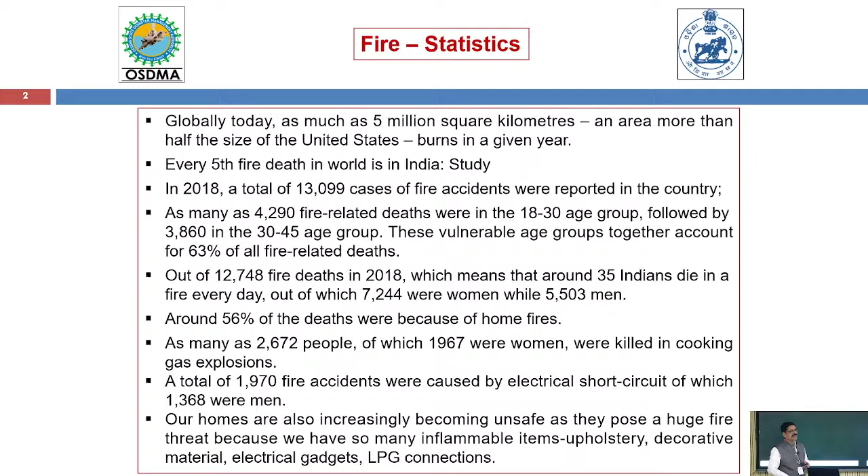If you look at the statistics in India, almost every year, 10,000 people are dying because of accidents, and Odisha's share is 10%. For the last 2 years, we have been number one. I don't know what will happen in 23, 24, 25, but till now our statistics remain concerning. Some incidents show that Indians died in fire, this was around 2019, but it indicates that 35 Indians died of fire accidents every day.

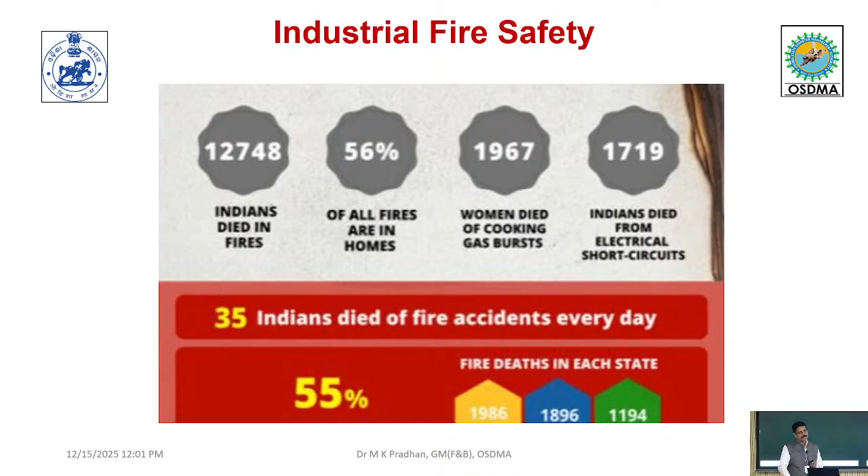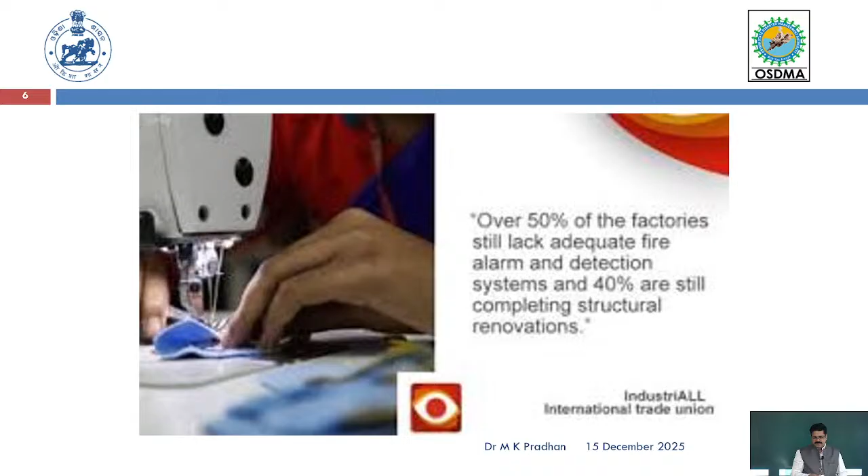If fire, I know these are all important, these things are known to you all. Now coming to the major causes of fire, the electrical source. Now you see, if you go to the fire department of government of Odisha, they will say 80% of fires are because of electrical origin. Do you know why?

The reason is once there is a fire and you go for inquiry, what will you get there? Everything is fired, only ashes are there. So the only probable thing is the electrical short circuit. Easy to tell, other things you cannot know. That is the reason why many people say 80%.

So electrical fire is like a scapegoat, all discredit goes to electrical people. But actually you don't know.

When I asked the fire department how did you know it is due to electrical short circuit, you were not there at that time. Nobody was there. If suppose an electrical fire, it will not happen overnight or immediately within 5 minutes. It will go on sparking, it will be heating, then slowly it will spread. And if it is not attended for quite a long time, then slowly it will catch fire. Am I correct? But people say it is electrical short circuit.

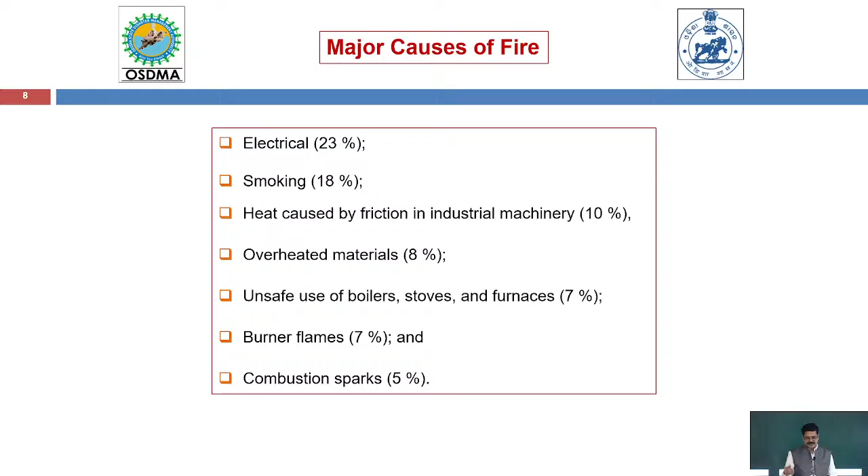Now we are coming to our state, Odisha. The best thing is these statistics we are getting from the National Crime Record. Now, the crime record gets all the information from the individual state governments. If the record is less, then these states are rewarded. So many states have their own arrangement for how to make records less.

Suppose there will be many causes - electrical fire, short circuit, somebody will say it's because of smoking like this. There will be another big column called 'others'. Others means the reason is not known, so that itself is very difficult. So they try to hide it.

But in the government of Odisha, you will be happy to know that it is already computerized. Even a person living in USA can give a fire call from USA through the portal and it will be addressed. How is it being done?

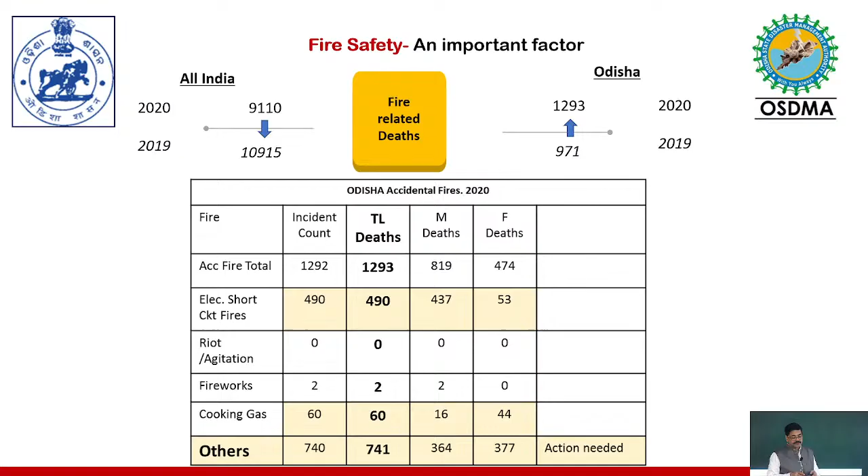Now, as I have already told, for fire there is an Agnishamseva portal, Government of Odisha. Now what are the things? One is fire safety recommendations. Can anybody say what is fire safety recommendations? For starting any project, high officials come to visit the site and they issue a certificate on what fire systems are required.

Correct. When you are establishing any industry or institute where there is a congregation of people, all these things require a fire NOC. Let us say the beginning is, suppose you have a building which will be approved by BDA or BMC. Then BDA or BMC will redirect the application to the fire department. So the fire department will give a recommendation that you require these things.

These must - fire extinguisher, these must - hydrant points, this is the water capacity, like this everything, this is escape doors like this. So they will give some recommendations. These recommendations, BDA will approve your drawing, and these recommendations will also be handed over to the builder. Once the construction is over, now the builder will go for a possession letter.

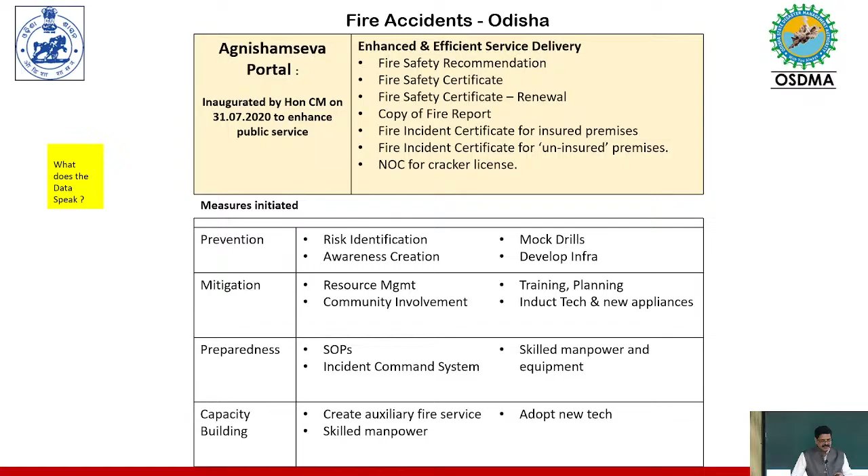So mitigation - that is what we have to now develop as preparedness. All these are their internal arrangements, which the people will do.

From government of Odisha side, OSDMA has made an MOU with Beyond Carlton, a person agency from Bangalore, to develop the fire safety framework in the twin cities Cuttack and Bhubaneswar. Beyond Carlton is the first of its kind in Bangalore, who developed the fire safety plan for Bangalore city. The owner of Beyond Carlton is a resident of the Carlton apartment in Bangalore.

In 2010, there was a massive fire where around 10 to 12 people died, including his son, who was also lost in the fire. From then on, they developed this agency.

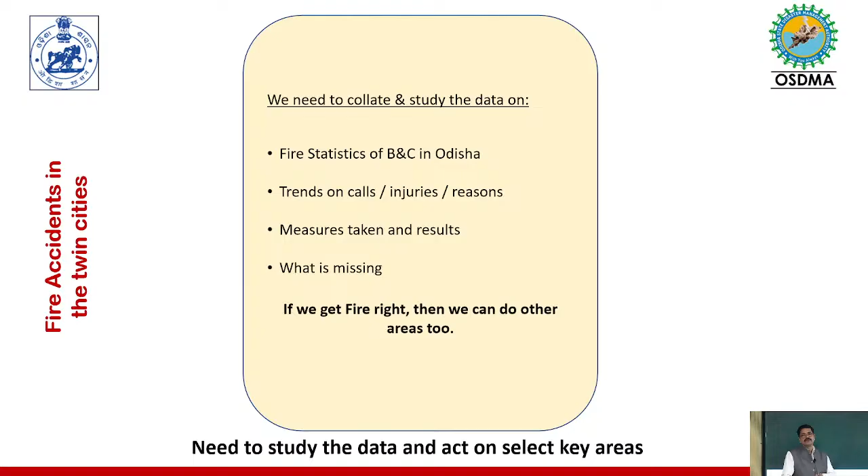Now for this, you have to understand the fire statistics of Cuttack and Bhubaneswar - fire trends, calls, injuries, reasons, measures taken, results, and what is missing. This is also what we are planning. We need to study the data and act on select key areas, because you cannot abruptly go for this. You have to identify which area you will address first. This is the integrated approach needed.

Pre-event, event, post-event. Pre-event, before fire, number one is design approval. Anybody is giving a design - suppose a big apartment, a 40-storied building, will be constructed at Bhubaneswar. They have engaged architects from USA, UK, and it will be approved by one engineer of BDA. Do you think the design will be understood by him? If he has not upgraded his knowledge accordingly, it will be very difficult. So whatever you give, he will approve.

So only approval is a formality. But if you really want to approve properly, it will take time. Now people feel the approval time being taken is very huge. So the people who are approving are now not taking any time - they are simply approving, leaving everything to God. So this pre-event design approval process also requires certain strategic things which should be looked at.

Design approval involves drawings and plans. There is a government drawing specifying this much area you have to do, this is the fire precaution you have to take - and people just say yes, matter ends. Then occupancy approval - National Building Code compliance. National Building Code is the latest, which guides you on what to approve. Now even the materials to be used - if it is a critical building, all materials should be flame resistant. So lot of innovations can be put into this.

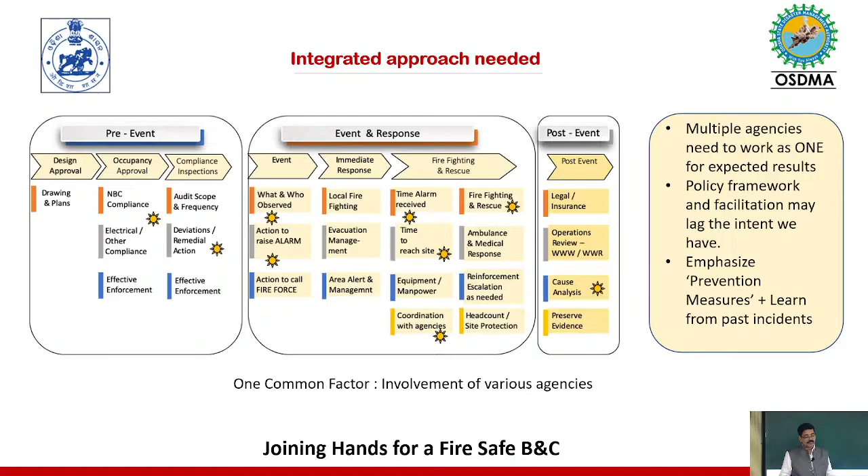This is the anatomy of a fire - the pre-accident phase that I have told you about. This is a flow diagram, again divided into three parts: pre, during, and post. Three things are there: one is the building design approval process, then occupancy - that I have rightly told you. Once occupancy is given, it should be 100% understood that all safety gadgets are in place. So that is one thing.

Then 4 and 5 is during the accident. Suppose a fire happens, then there is incident reporting, response with interdepartmental coordination - a lot of people are required. Someone will rescue the victim, give immediate first aid, then they will be brought to the hospital. In many places, suppose in a factory there is an accident - what happens is they give calls, the person is rescued, then an ambulance is brought in, and they are sent to the hospital. It takes another 30 minutes.

Now suppose immediately after the accident you give a call to the hospital - they will send an ambulance with doctors and facilities. So by the time the patient is rescued, the ambulance is already there at the factory. Or suppose there is some problem - what will you do? You will give first aid, everything, then call, then it will come. So it's a matter of time, and that is the golden time. Mobile ambulance systems can also be put into practice, particularly in industrial belts, so whenever there is an accident, you call them and they come to the site. This means the response times will be reduced.

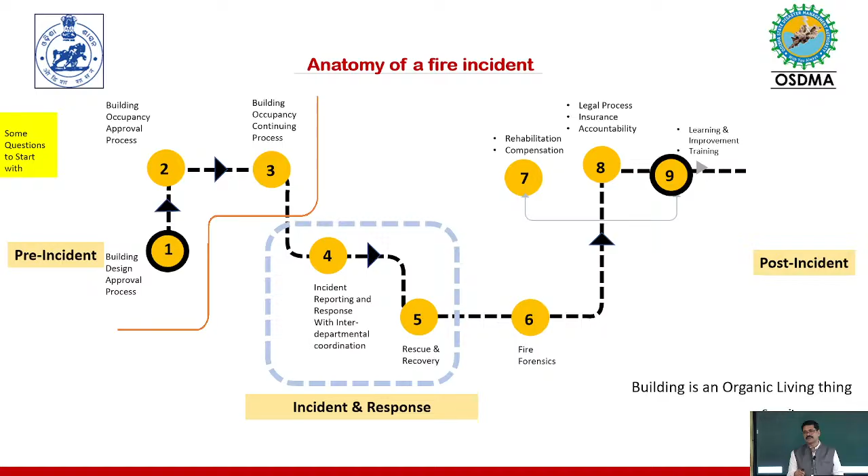Then once everything is over, there is the post-incident phase - why it happened, how it happened, rehabilitation, compensation, legal matters, forensics in some cases, then learning, improvement and training. The only thing done is learning and improvement. Whatever I am talking about now are all the learnings we have come across from different incidents, and we are trying to improvise.

This is what I am talking about, the industrial buildings exclusively that we are looking into - low hazard, moderate hazard, high hazard - that is required to be understood.

Many times flammable materials are there. Suppose furnace oil is being stored in a factory, 50 kL. There are different combinations: that 50 kL can be put in one tank, or that 50 kL can be put in 5 tanks. Which is better?

If it is 50 ton in one tanker, if it catches fire, all 50 ton is into problem. If it is 10 ton each in 5 tanks, and there is a fire in 1 tank, the other 40 are safe. There is also a chance that you can pump it to another empty tank. So if you make less capacity and more tanks, then from a fire point of view it is better.

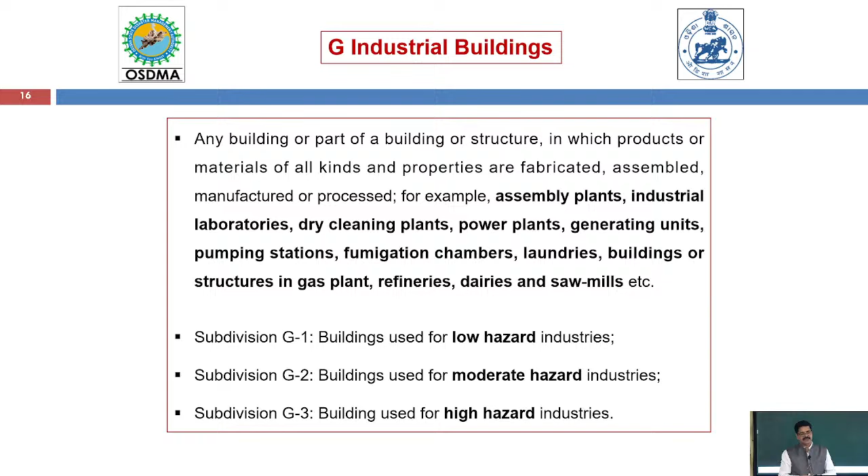Similarly at home also we have to keep things in mind. Suppose there is an electrical connection - we have to see that flammable items are not kept very close to it, as there is a chance of short circuit. All flammable materials should be removed. Very simple things can be managed accordingly.

So fire load calculation is very much important. Instead of arbitrarily deciding how many fire extinguishers to give, what is required is that you make a calculation - you have to understand what types of fire extinguisher are required, what quantity is required, and how many are required.

Suppose this is a building where a lot of flammable substance is there, and somebody asks me to provide fire extinguishers. Now I have a choice - these are my two doors. One choice is I will keep one fire extinguisher outside each door, and keep as many as possible. Second, I will keep it inside, so that you just open the door and it is there. The reason: if you keep it outside, someone can take it away.

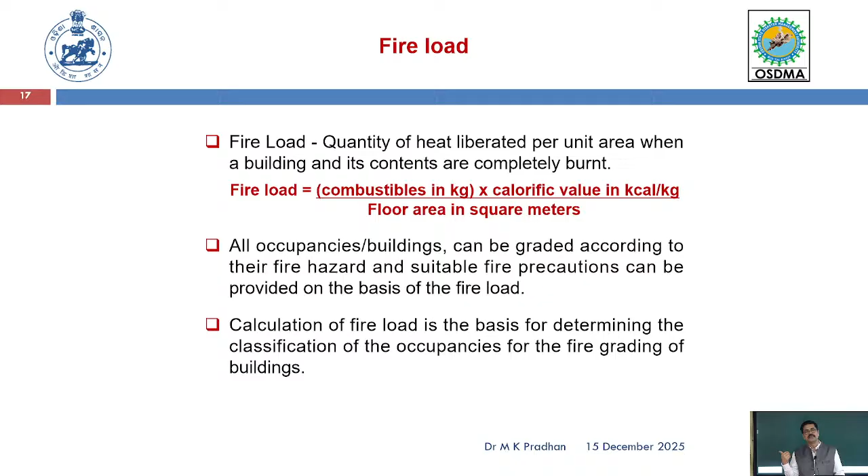Somebody will say keep it on the roof height so nobody will take it away, but at the time of fire, how will you get the ladder and other things? So it's always better to keep it at your reach, and always have one fire extinguisher outside the building, close to the main gate or door. The reason is you simply catch one fire extinguisher, open it, go and start firing. There may be conditions where it's already on fire, and at that time you can help. So all these things come into picture, and depending on your approach, things will improve.

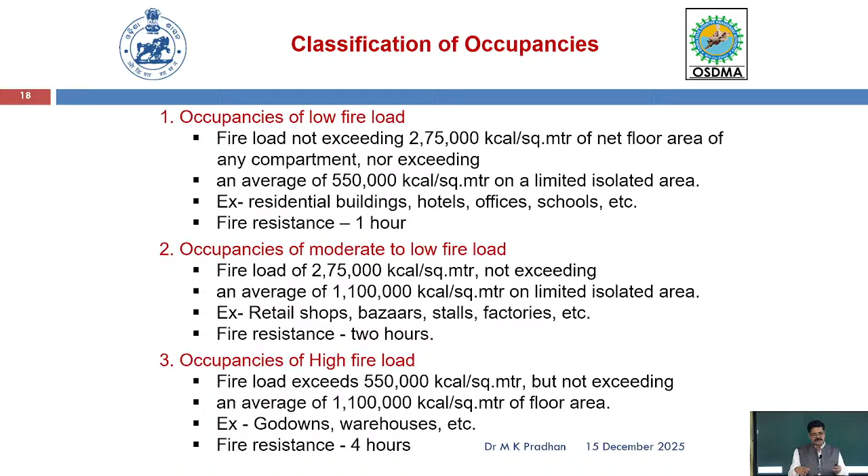Then occupancies of fire load calculation - this is what is given in NBC, so all the data will be available to you. Then some storage and shelter buildings - these are also there.

Now flame resistance - these are some of the basic properties of building materials, on which NBC gives recommendations. You cannot mandate that you have to use this, it's left to the people to use it, because whatever the law states is not for the maximum, it's for the minimum requirement. If you don't meet it, then you are not allowed.

Just like personal protective equipment - helmet, that I told is the last degree. First degree is your prevention or suppression. Second is a barrier. Suppose there is noise in some place, or in a steel melting shop with a hot process - when somebody is exposed to the heat, definitely he will feel uncomfortable.

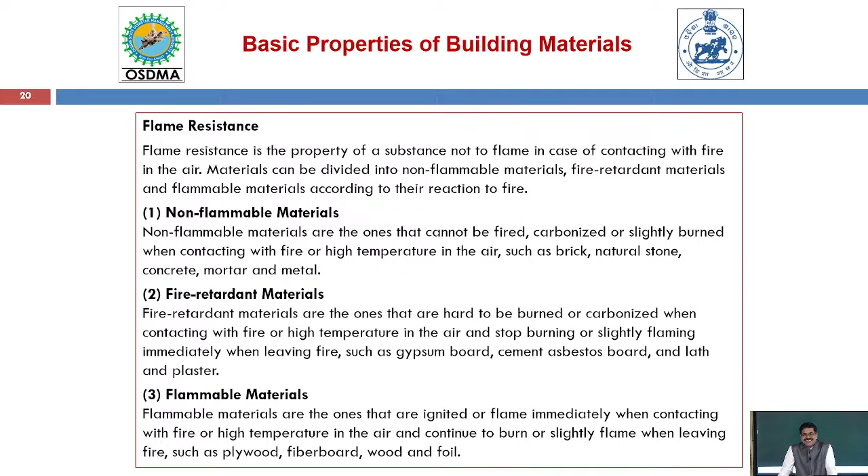Just like the people in the court - even in direct sunlight at 45 degrees, they are still using it for 8 hours. Very difficult. They are charging a little high. We say, why are you taking so much? But you feel the heat - internally they are going through it.

Now suppose this thing, I have already told - suppose ammonia is now used in Paradeep. In IFFCO, now they have already made it 50,000, and they are having also more than that. Now the point is, there is a chance of fire.

What we study is, suppose ammonia leaks, it has got two things. If ammonia leaks, there is a gas - that ammonia gas itself, if somebody inhales it, then he will die. Now what is the permissible limit? Permissible is 50 ppm at work spot for 8 hours, but we recommend 25 ppm should be there. Now suppose to maintain 25 ppm at work spot, and suppose there is a leakage, this can travel up to 5 kilometers.

So you have to evacuate people at 5 kilometer radius. But the interesting thing is, the smell can go up to 25 kilometers, and the people from 25 kilometers will shout more. And you cannot say there will be no problem - they will say how.

It is just like many people complain that there is a lot of dust - very problematic. What is the problem because of dust? Can anybody say?

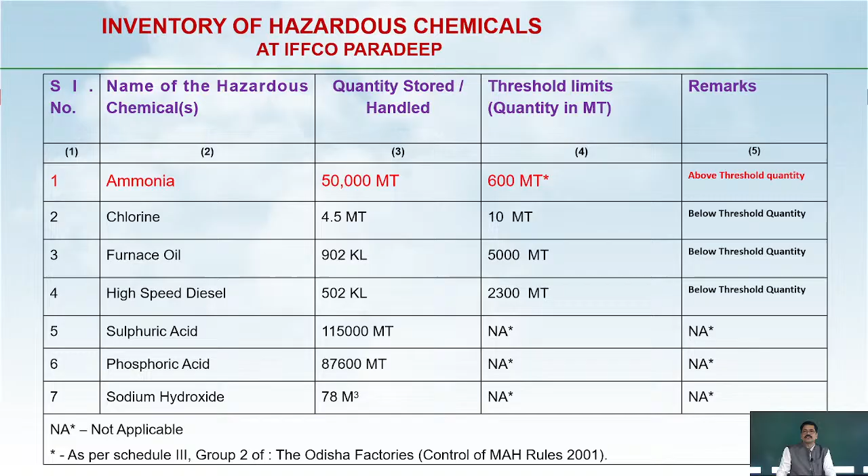Even naphtha once leaked from Rourkela Steel Plant, it passed through the drains and went outside. Somebody threw a cigarette, and it came back from the market into the city, and fire broke out. So all these things can also happen.

So these are the types of hazards which we generally come across.

How much distance it will move, you cannot say, because it depends on the air velocity, air dimension, quantity, and at that time humidity and other conditions, the dispersion will take place. There are dispersion modeling tools available, so for the worst-case scenario, you have to understand this.

So there will be a core zone and a buffer zone. How many people are required to be evacuated? You must know these details. So all these things come into picture, and this is dealt with in the on-site emergency plan or disaster control measures.

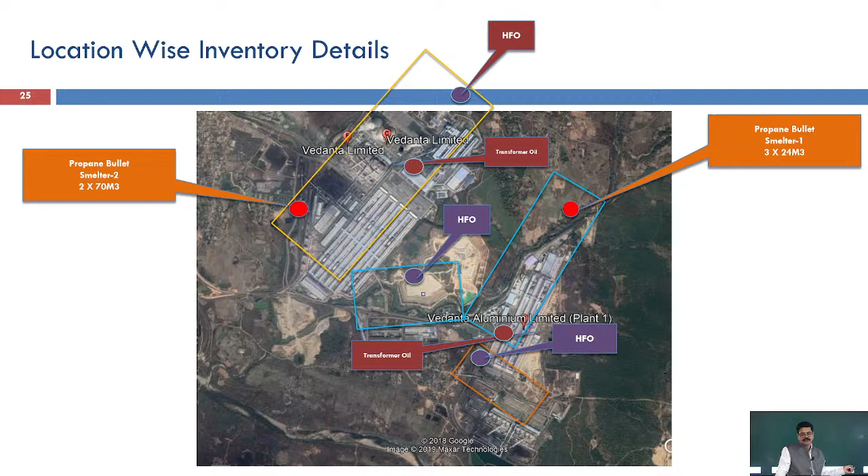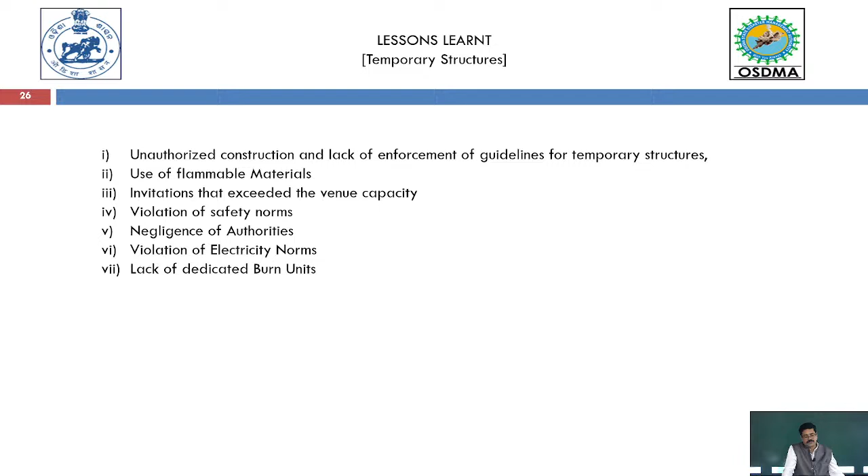And the reasons of failure: poor building design. Actually, what we mean by poor building design is that people make their own design later on. After the original design is over and construction is done, people make their own modifications. That is something very problematic.

Obstruction of fire escape routes - if you go to any hospital, you will find medicine and other items kept on the staircase, because that is the only free area. Every other area has patients or equipment. So nobody notices this, and when we go to a hospital or hotel, we only use the lifts. We don't even know where the staircase is. Because many people don't use the staircase, hospitals and hotels keep all their items on the staircase floor, causing obstruction.

So in case of fire, you will not be able to use the lift. At that time, all these things matter: lack of early warning system - an early warning system is very important - and lack of emergency procedure.

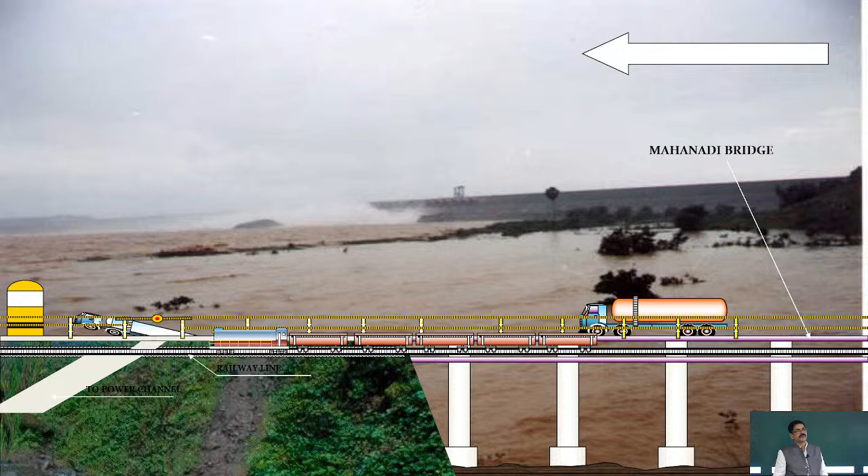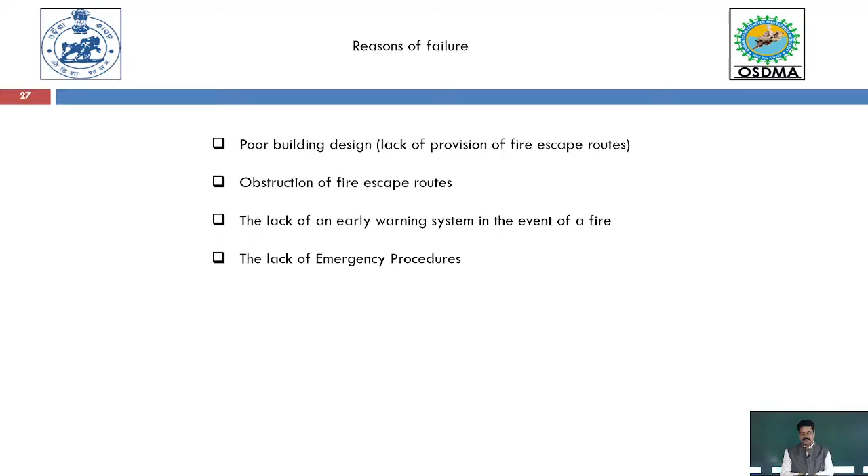Just before I end, I will repeat this again. I have taken a snap, a virtual snapshot. If anybody has visited Sambalpur, from Sambalpur to Burla, there is a dam just after this. This top one is the Hirakud Dam.

Now water is coming, this is the bridge, this is a train line. A train is already there. These are the LPG tankers - two tankers were coming, one toppled and the LPG started leaking. This is another tanker that was coming. This is the condition. Now think about what you would do.

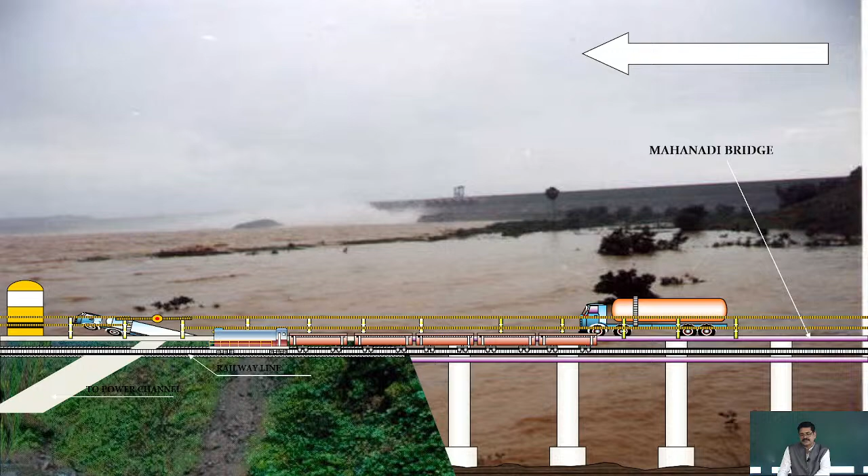So this is all about. Thank you very much.

Any question you can ask me? Any questions?

You were talking about three types of safety. You explained only one.

Three types of safety: the first is safety at source. To prevent it, there are two things. One, eliminate or suppress - I have told you about this. Second, you give a barrier, because there is some unsafe condition or hazard, and the person who is going to be affected - if you can give a barrier between the hazard and the person, this is the second degree.

Why? Because still engineering control is required. Third, when you cannot do that, you only protect the person who will be affected by the hazard with PPE, personal protective equipment. So that is the third degree.